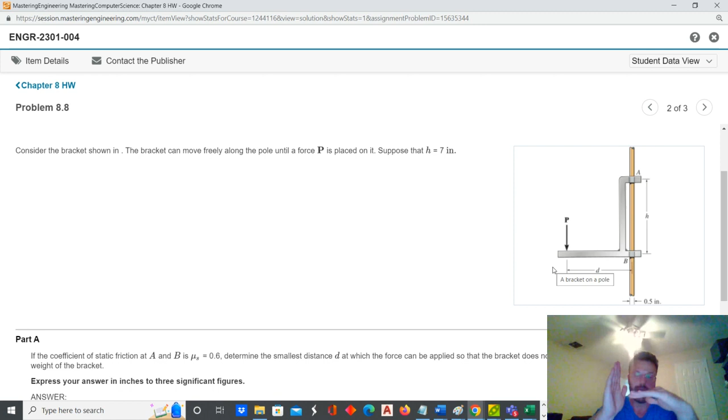Namely, when you push P on that horizontal arm of the bracket at length D, that bracket is going to tend to rotate in the counterclockwise direction. So the actual normal force that the rod is exerting on the bracket is what's going to tend to kind of stop it from rotating as well. So there's a lot going on here, and the way that you typically approach these problems is to draw a free body diagram. And once you have the free body diagram, go back to the problem description and see how much information you can actually tease out from what you're given.

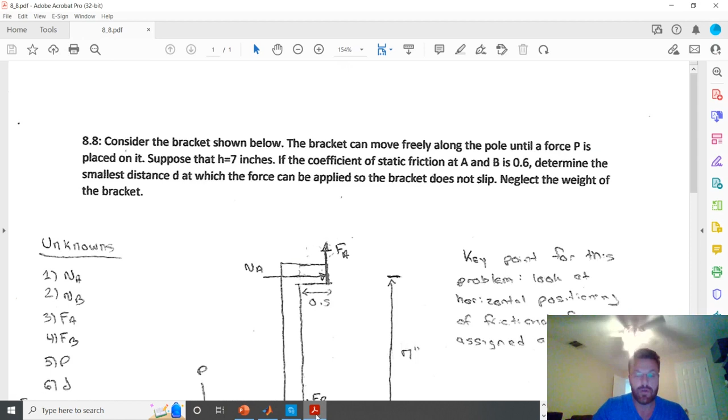Because part of what's confusing here is once we have the free body diagram, which we'll look at in a minute, and I just want to be clear that this is kind of the vertical component, and these little stubs here are the circular collars that are actually slipped over the rod. So you can imagine the rod passing purely vertical down here. Now, I think the hardest part of solving this problem is understanding where to actually draw your frictional forces, which we'll talk about here in a minute.

So pretty obvious that the applied force P is applied at some distance D. That distance D is referenced kind of from the middle of the actual circular collars in the bracket, and you're told that the diameter of those collars is 0.5. So note that in the actual original drawing, and I'm going to go back to the actual problem description here, they're calling point B a point on the bottom that's at the leftmost edge of the actual circular collar, versus point A is at the rightmost edge of the circular collar.

And if you don't remember that, of course, this is slipped around in a circular fashion, so that frictional force is distributed across the entire contact surface between the bracket and the rod. But if you don't apply your frictional forces at the exact points that they've shown, A and B, so A goes on the right side of the rod and B goes on the left side of the rod, you're going to have some problems setting this problem up. And I'm imagining if any of you are having problems, that's exactly what's going on.

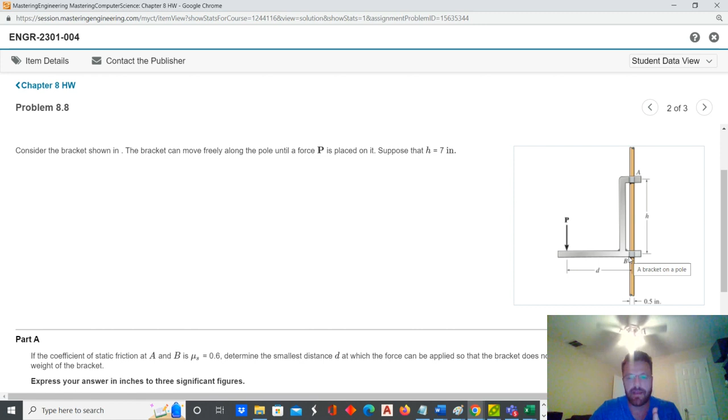Now, the question is, well, how would you know to actually apply it there? Well, you have to kind of leverage the fact that they told you the coefficient of static friction is 0.6 at those points. So be very careful here. It looks like these are kind of drawn at the same point, but in fact, B and A are offset horizontally. B is on the left side of the rod, and A is on the right side of the rod. And if you don't draw it that way, you'll never get the actual setup correctly.

So in both cases, right at the point at which we're kind of modeling the interactions of the surfaces, we'll have a normal force that's perpendicular to the surfaces and a frictional force, which is parallel. So in the case of the upper collar of the bracket, that's going to be on the right side, as I've shown. In the case of the lower collar of the bracket, it's going to be on the left side.

So think about all the unknowns that we have. We have two unknowns associated with the normal force, two unknowns associated with the frictional forces. We don't know what P is, and in addition, we don't know what this distance is. That's what we're trying to determine. So we have 6 unknowns.

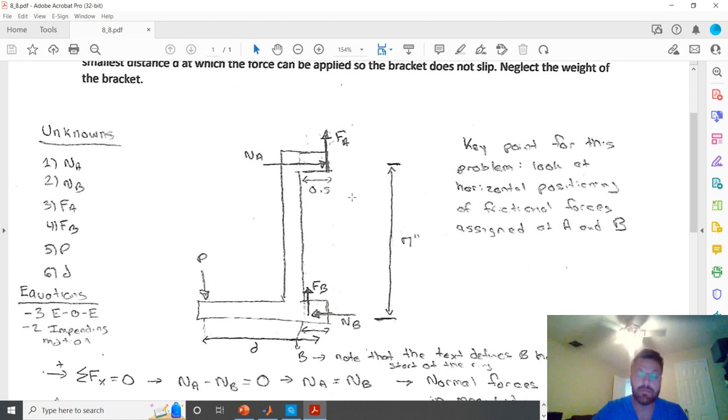We have 3 equations of equilibrium, and we can also apply, because we're trying to find that minimum distance D, that if we were to extend beyond that, this bracket would slip. We have 2 equations of impending motion, because we can actually assume that these frictional forces are the maximum static frictional forces that can be applied. So in terms of going back to the problem statement, that comes from the part, the bracket doesn't slip.

So one thing you'll notice automatically that might look a little bit weird to you is frictional forces, right? We have to assume their correct direction on the free body diagram, because that equation that we have for impending motion, frictional force is proportional to the normal force, that doesn't have a sense associated with it. So we always have to be careful to correctly assume that the directions of the frictional forces oppose impending motion. So if this bracket is being pushed down, clearly the frictional forces are pushing it up in order to stop it from moving.

However, for the normal forces at the reactions, remember all the problems that we've worked up until now, we can always assume whatever direction of those forces we want on the free body diagram. And if we assume wrong, the math will work itself out. So I chose in this particular setup to naturally assume that the normal force at A is kind of pulling that bracket back to the right, and that the normal force at B is pulling it to the left.

Now, you might ask, well, why would I choose to assume that? Well, if you just look at what this force P is going to do when it's applied, it's going to rotate that bracket in the counterclockwise direction. So clearly the normal force at A, if we were to enforce a moment about point B, which we will in a minute, is the only thing that's tending to counterbalance that rotation.

And another way to look at it is, if you think about summing all forces in the horizontal direction, if these aren't equal and opposite, then they both must be equal to zero. So that's why I chose to show NA going to the right. Physically, I know that it counterbalances the tendency of that force P to rotate in the counterclockwise direction.

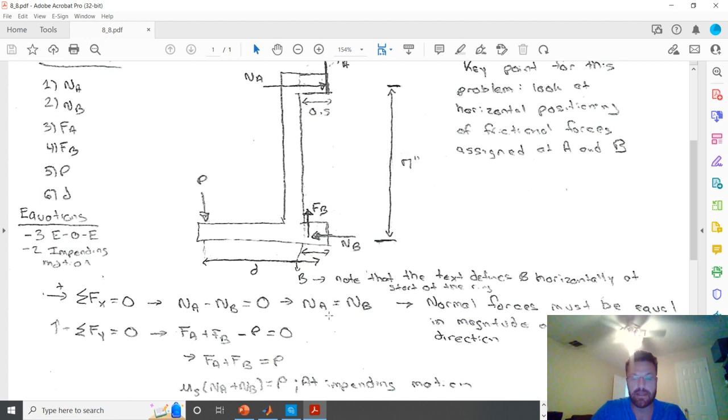So if I sum all forces in the x direction, I have NA going right and NB going left. So NA minus NB equals 0, or NA just equals NB, which, as we mentioned, shows that the normal forces are equal and opposite. If we sum all forces in the upward direction, we have the two frictional forces, which are counterbalancing that applied force P, which wants to shift this bracket in the downward direction. That tells us that those two frictional forces must sum together to be P.

We know that we have an impending motion situation. We're interested in solving for the scenario where this bracket is just about to slip. So I can replace FA and FB by the maximum frictional force expressions. Each is the coefficient of static friction times a normal force. I've just factored that out.

And what this really shows me is, at the point of impending motion, since I know these NA and NB are equal based upon the sign convention that I've shown above, they're equal in magnitude and opposite in direction, I have a relationship at the point of impending motion between the applied force and the normal force. So that's kind of coming from those first two equations.

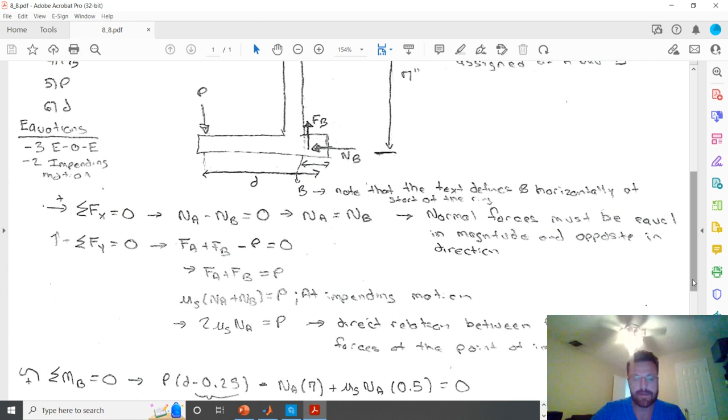In addition, if I sum all moments about point B, now this is a confusing part, because remember that your B is defined as kind of the left edge of that collar. So when I compute the tendency of force P to actually rotate in the counterclockwise direction, hopefully everyone sees that P is going to induce counterclockwise rotation, so it gets a positive sign. The magnitude of the force is P. The question is, what is that perpendicular distance?

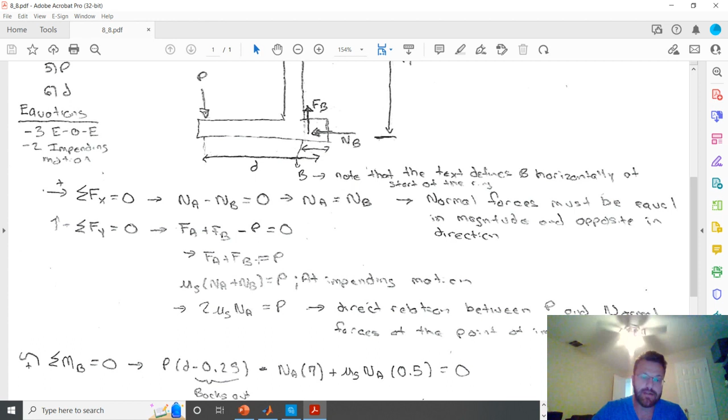Well, note that the way that the book has defined distance D, it goes from the point of application of P to the actual middle of that collar. So if you know the collar is 0.5 inches of diameter, to get back to B, which is on the left end of the edge, you have to subtract out half of that diameter, or the radius. So that's where this perpendicular distance is coming from.

In addition, when we consider the tendency of the normal force to rotate it back in the clockwise direction, by our sign convention, that will be a negative rotation. The magnitude of the force is NA, and this distance is actually pretty easy to see, right? That's just going to be our 7-inch height that we were quoted here. So that's where that's coming from.

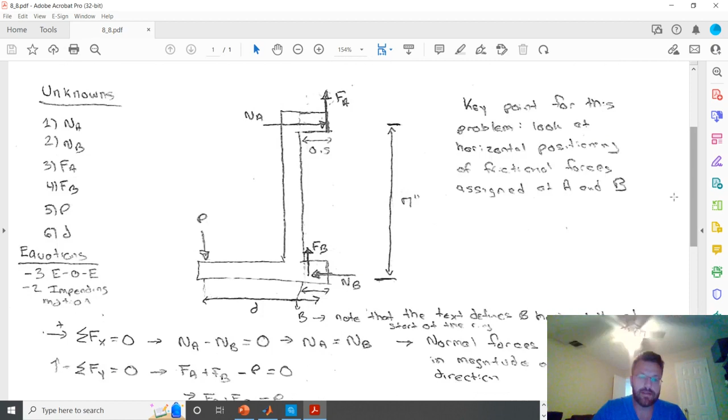Probably the most confusing part of the problem is when you consider the tendency of this frictional force FA to rotate about point B. Naturally, it's going to be a counterclockwise rotation, so you know that's going to be positive. We know the force is FA, which we can replace by, since we're in impending motion, μs times NA. But the question is, what's going to be the perpendicular distance?

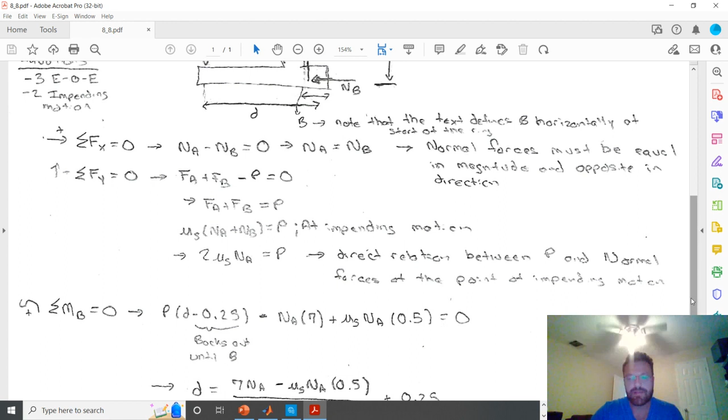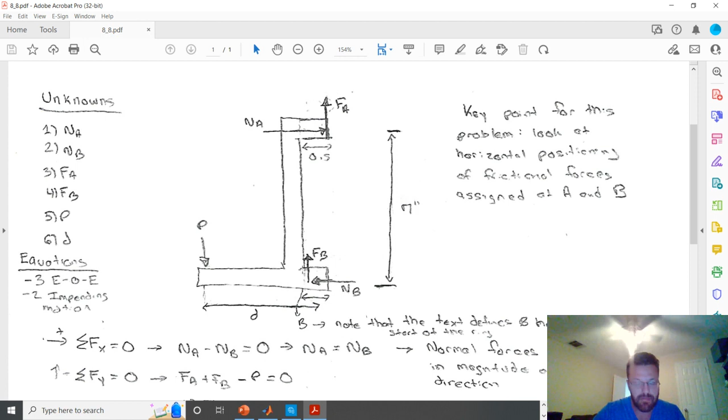Well, the perpendicular distance is, in this case, just going to be the diameter of the collar. And the reason is, if you drop down that line of action of the force, it's on the right edge of the collar. And remember, point B is on the left edge of the collar, so that distance is nothing more than the diameter. So it looks like we just are drowning in a bunch of math, right?

Basically, we know that from equations 1 and 2, we have a relationship between the applied force P and the normal force. And it doesn't matter which one, because equation 1 shows us that both are equal. So the best we can do is just try to solve this for this unknown dimension D. And what you'll find is, when you try to solve this for D, in the numerator you have two expressions that involve that normal force NA,

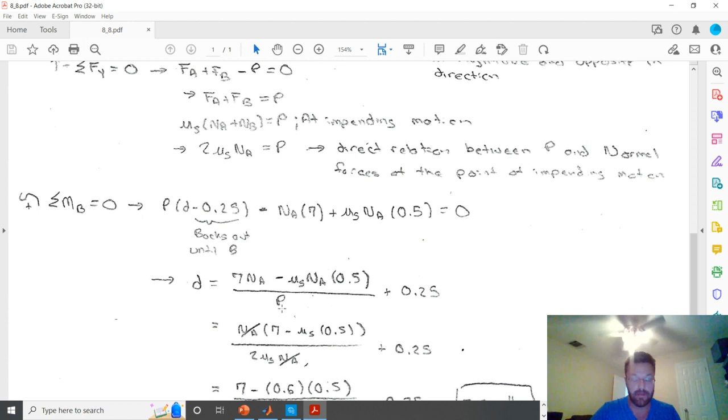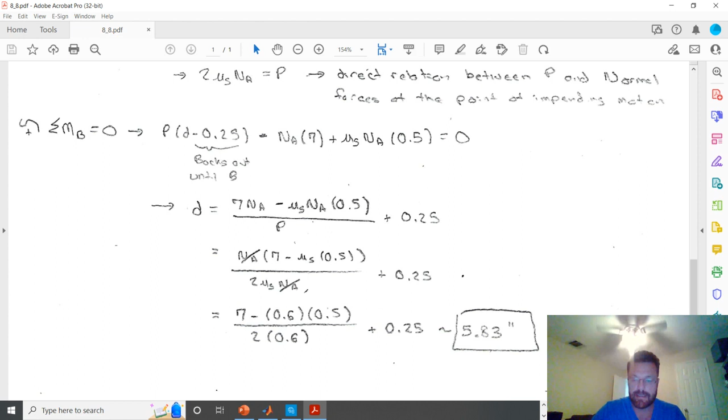and in the denominator, you have the expression that involves the applied force P. But remember that you can relate NA and P. So if you factor out NA and then substitute P in terms of NA, you'll be able to cancel, and believe it or not, what you get is something that's totally determinate, just a bunch of numbers that you can plug in. And hopefully when you do that, you will find that that distance you're looking for is 5.83 inches.

So again, this problem, particularly if you happen to take some inspiration from online sources where the actual setup was available, the math, in terms of writing those equations, if you know the perpendicular distances, is relatively easy. And if you don't really think about what's going on and you just treat it as an algebra problem, it's not the worst thing in the world to solve.

But there's a lot going on there physically that I hope you take some time to think about and really consider, because it's a good indication of whether or not you're actually getting what you want from this course, particularly if you're going into mechanical design or civil engineering scenarios where you're going to have to think about objects in equilibrium off